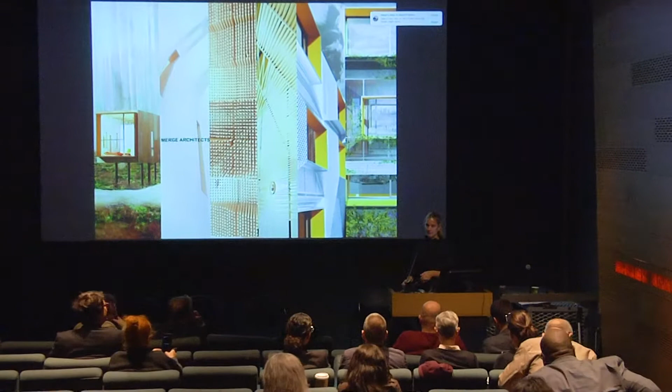I'm so relieved, Brian, that I'm not the only one up here not talking directly about affordable housing, because I got super nervous when David invited me. I'm like, I'm not really doing the HUD, in all caps, kind of housing.

But what we are doing at Merge is building housing for incredibly low prices per foot, so in theory we're also building them in neighborhoods that are not that pricey. Although I'm proud to report that all of our housing projects are creating records for high sales per foot. So I believe good design sells.

I know Larry last night was talking about how he has these pro forma sheets that he compares with all of his projects, and then the naysayer developers say, well, that's going to cost a lot of money. And he talks about how much more they make and the comps they got for the last project. So we're not as seasoned, or we haven't been around as long as Brooks Scarpa, but we are starting to also have our own short list of each housing project that has been a success in that way.

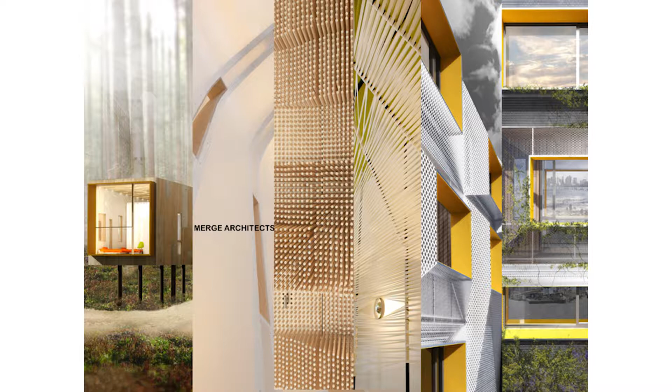So a little bit about Merge. I'm bringing up the rear here, really talking about design. I don't have these altruistic stories of amazing projects like Jackson and Kansas City. We are living in a city, Boston, forgot to say that, that is in a way a very sophisticated city, and ironically one of the hardest places to build good contemporary work.

There are so many things standing in the way. There are a lot of well-intended folks there, and there's a lot of money there. And we're booming. Mayor Walsh wants 53,000 new housing units by 2030, and yet we are a city of 9-unit projects. The reason is 10 or more per the city zoning code forces the developer to include 13% affordable units. So unless you're doing 20 units and you have the site to do 20, it doesn't make sense to do more than 9.

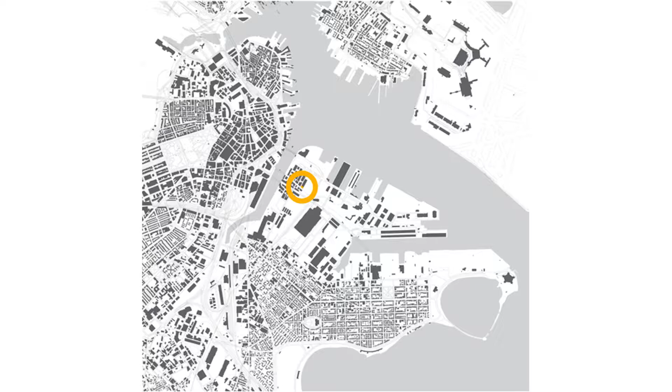My office is in an area called the Seaport, or Fort Point Channel, if you guys know Boston, an area of the city that has grown exponentially in just the last 3 or 4 years. But this is the fabric of Boston that many people know and love, with all due respect. I do too, but that's not the kind of work that we do or that we're interested in, and it's also not the appropriate

aesthetic and stylistic for a lot of these neighborhoods. So it's either the brick and the heavy layered detailing of the facade, or it's the classic triple decker, which is something we end up building up against more often.

But what we're really into, just to take it outside of housing for a second, is a little bit of just good old-fashioned craft in a way, thinking about it as assembly, putting things together.

We also make, David, that's so cool that you have a steel shop, wow. We could barely fit enough desks in our office, we don't have that kind of space or capacity. But at Merge we are actually building a lot of the pieces on our projects ourselves, and the way we're doing it is we're asking the GCs to let us borrow their boom for the day so we can build this piece or that piece. It's a way for us to be super hands-on, but also a way to maybe build something for $25K that the GC was pricing out at $200K.

So it's a combination of traditional construction and general contractors and us kind of getting in there and making it work. The kind of thing that I'm fascinated by is what can we do with this?

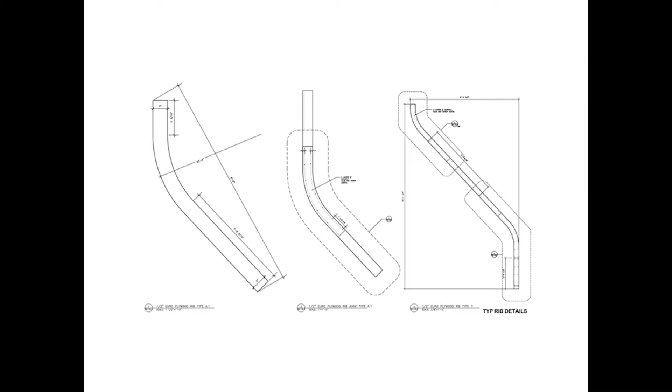This is an orthodontist clinic where the GC built out the whole space, but we did these CNC cut ribs, and our office actually fabricated this polycarb wall to create this glowing double height space within the back of this program. So that's just a little bit about craft.

The next thing I'm super interested in is the social ecology, so to speak, of architecture and how people use space, which is where housing comes in - like how people live together, living room to bedroom. You guys really set it up so well with all of your plan explorations about the living room, the core, with Brian. And so how people live within a tight unit within the city, but also how those dwellings live within the block.

Because we've been working on some pretty small scale, 9 units and less - in Detroit we're doing 100 units, but in Boston, 9 units or less so far - we really have to grapple with this. And because every developer wants to build as much as they can, square footage wise, we have to really game the zoning code. We really have to pack in 9 units when maybe it really can only fit 6. And then there are often these crazy parking requirements which seem to make the project impossible.

So Boston is tight, Boston is dense, it's very different from Jackson or Kansas City, much like I would say Philly. And you know, these 11-foot wide leftover sites are fascinating to me. We haven't quite been that extreme, but I would love to have that opportunity. But they always feel crazy tight to us regardless, even if they're wider. And they become like 11-foot sites because we need to pack 9 units into, let's say, 40 feet.

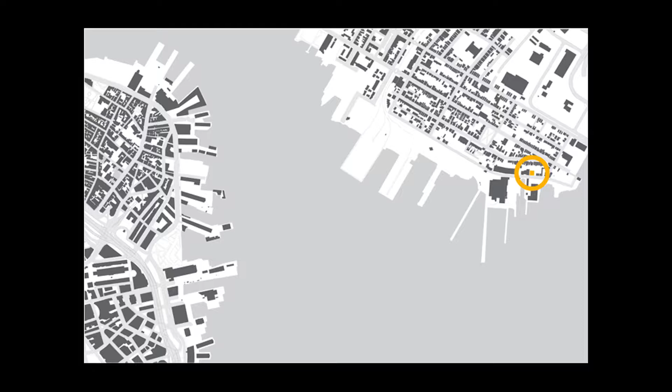Which is an active shipyard. It's partly active for the shipyard program use, but it also has a really interesting arts community where they're building these incredible giant sculptural pieces, which I'll show you in a minute. And there's a cool cafe there, which is kind of hip. So it has this vibe of an innovative place and maker culture.

And then here we got this choice little site, which conveniently is right adjacent to the edge of the shipyard. There's a chain link fence here that separates the shipyard from our site in the so-called neighborhood, which is called Jeffries Point, and flanked by the classic triple decker.

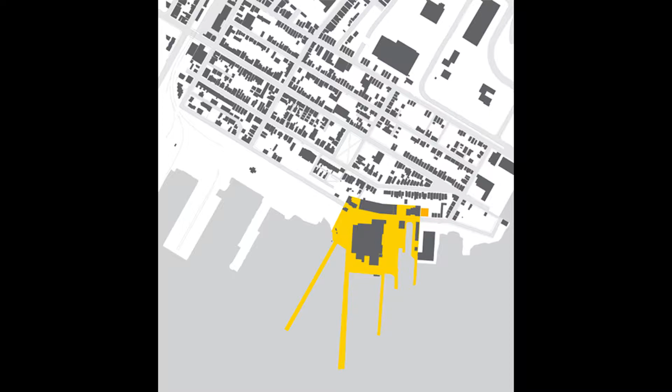So I just want to pause here for a minute. I'll show you this aerial. In Boston, I have never done an as-of-right project. I don't even know what that looks like. Every single housing project we do has at least 8 to 15 variances that we have to ask for, which is crazy. And it's because most of them, not to get too in the weeds, have an FAR, floor area ratio, of 1. That means that if you have a 2,000 square foot site, you can only build 2,000 square feet of square footage to sell.

And really you often need twice that, or 3 times, and sometimes even more. So one variance means you have to go in front of the whole neighborhood process, meeting after meeting after meeting, and the city process with the Zoning Board of Appeals, and the Boston Redevelopment Authority's design review, if you're lucky enough to get approved by the Zoning Board of Appeals. So to build 9 units, or even 4, could take 8 months to even get out of the gate. So it is very political, very time-consuming, and you have to build a narrative around your project.

And the crazy thing is, there is so much, as with any city in the US I think, mediocrity in terms of housing design - not in this room, but there is in Boston. So what we're seeing is just this sea of Hardie board, super taut facade projects because they're cheap. The kind of ugly, mediocre at best projects are sailing through the system because they're familiar. So if you're ever trying to do something exceptional or trying to push design, it takes longer.

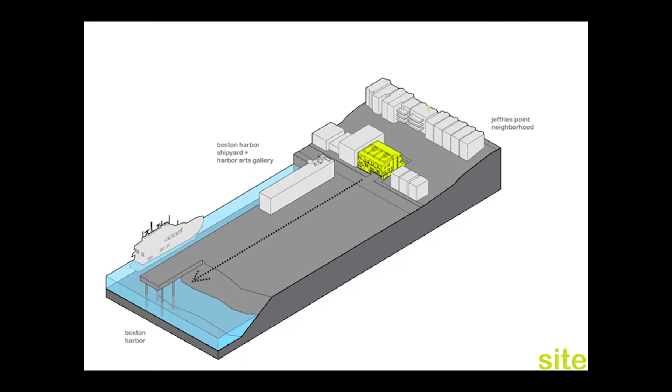All these projects I'm showing today are light frame. The challenging thing with this project was that we needed light and air for the living spaces, yet we had to have bedrooms. They couldn't fit once you fit 9, which you can see a little better here—they're really skinny, maybe 13 feet wide each, so there isn't room for a living room and a bedroom on the front facade, so we had to put them in the back.

So the crazy thing was, how do you have these floor-through units and have a common corridor and 2 means of egress on each side? We get into geeking out on these sections in housing—how do you game code, how do you pack in the 2 means of egress, and how do you get light and air to all the units. The idea was that we would skewer the units, the middle 4, with the common corridor, which meant you were blocking off the back from the front of the unit.

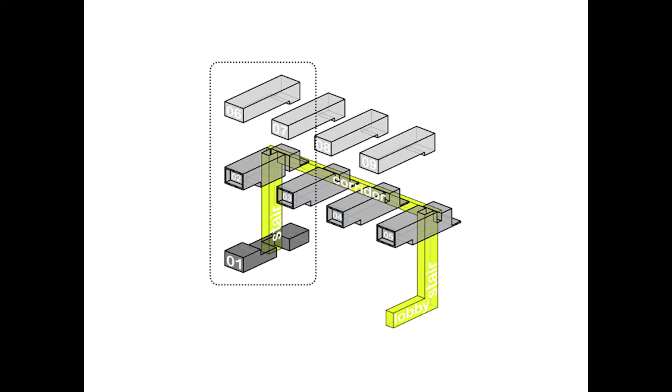So what we ended up doing, which was a problem that became one of its greatest assets, was we went over and under the common corridor. The other thing, which is a theme with Larry's work, as Brian mentioned too, is how you sneak in another floor.

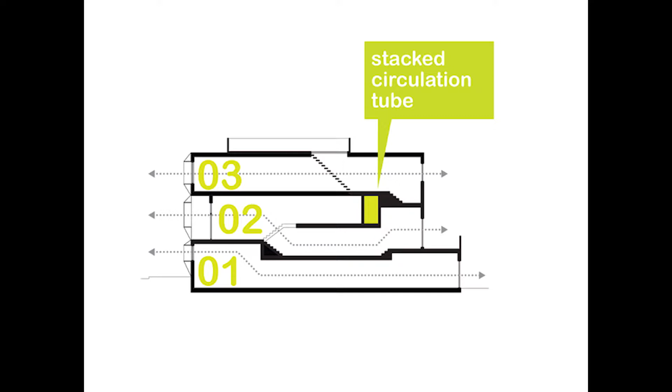We were only allowed to build 3 floors, so from the front it looks like a 3-story building. But we snuck in a mezzanine floor in the middle of the section, which allowed us to go up and over the common corridor that needed to go cross-grain through the unit. All these tricky, crazy things you don't see from the street are something we're really interested in. The way it operated was what we'd call level 0, which is the parking.

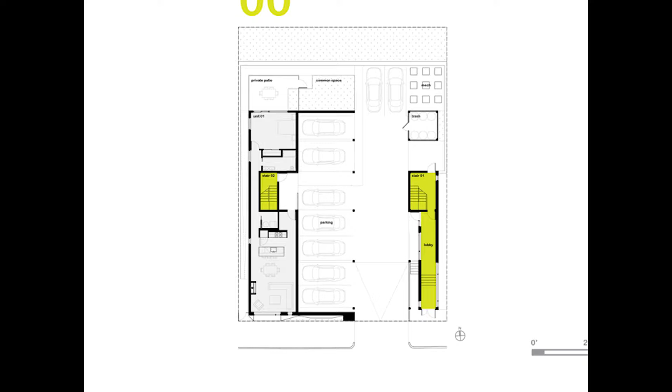The other thing politically was that, as luck would have it, one of the neighbors—our direct abutter in the back, who was slightly elevated from us, thank goodness—worked on design review at the Boston Redevelopment Authority. He had to technically recuse himself from the design review, but as a neighbor, he was at every meeting making sure we weren't going to block his view.

As of right, we could build 35 feet, but through negotiations we were not allowed to build over 33 feet 6 inches—or maybe 5 inches—because of him and what he sees from his kitchen window when he's drinking coffee at 8 o'clock in the morning. I sat with him at least 3 times to see exactly what he would see.

We made that agreement, and he was out there measuring the framing until he got kicked off by my client at the site many times throughout construction. It's crazy stuff that isn't written down. He ended up supporting the project because we came to these concessions, and we then had to sink the parking 3 feet, but we couldn't go any more than that because we were on the ocean and would hit the water table. So we were literally like this.

And of course we were right at the setbacks for the zoning side setbacks, minimum. And then we were at 0 lot line on the front and at the full allowable setback in the back.

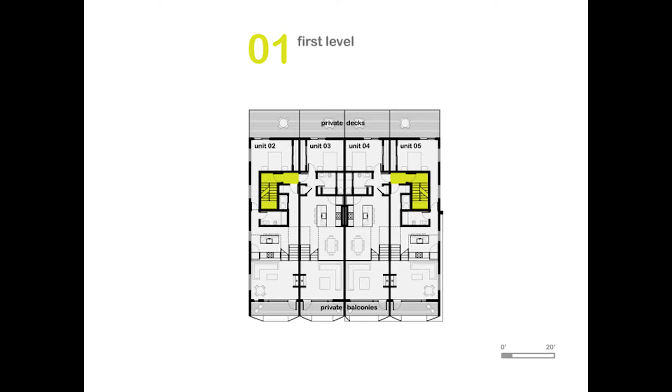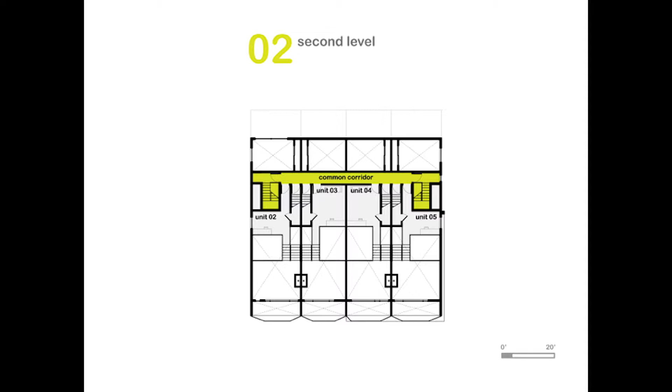So on the ground floor, there are 2 entries, 2 stairs. As you go up to floor 1, the 2 means of egress are separated, but those become technically the front doors to those units because it's closer to the street. And then on the 2nd floor we have this common corridor that I showed you in section, which allows you to check the box of the 2nd means of egress in the unit, and also to provide front doors for the top floor units, which are floor-through flats.

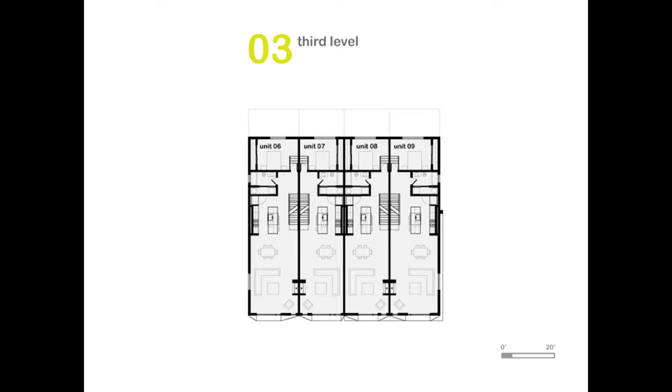If you build a 4-story building in Boston and you don't access the 4th floor from the interior of the unit, and it becomes a public access point, you have to put an elevator in. So we avoided the cost of the elevator by accessing the 4th floor only from the 3rd floor. I know this is tedious, but this is what we do.

And we think it's cool that you can figure this stuff out, and we pack 9 units on the site. And then there are 4 private roof decks, which have this amazing view. This is a really quick little animation of what I just said, which is this tube typology of the unit. How do you stack them?

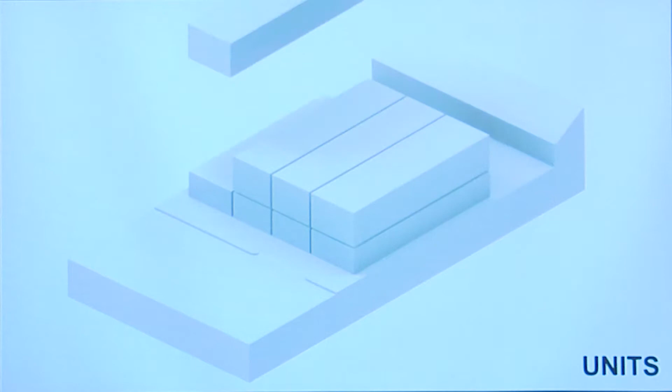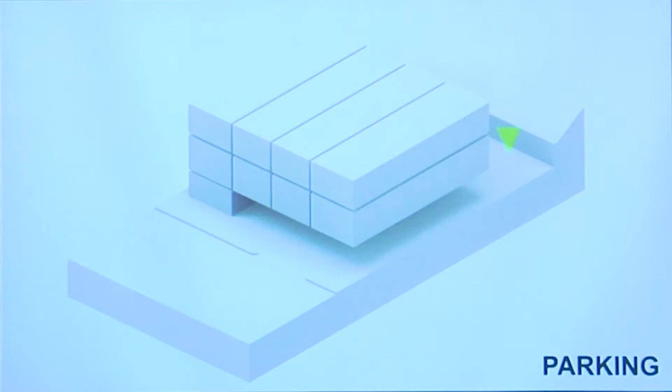At this time, within 35 feet, we had to come down a bit. Carve out, we had to have 1 parking space. Here we are packing the site, and we have to get 9 cars in there. So we carved out the ground level, and went down 3 feet for the parking, which allowed us to think of this more as a basement per code.

And had one handicap unit on the ground level, which is the lower level. We cut the section. This was our problem.

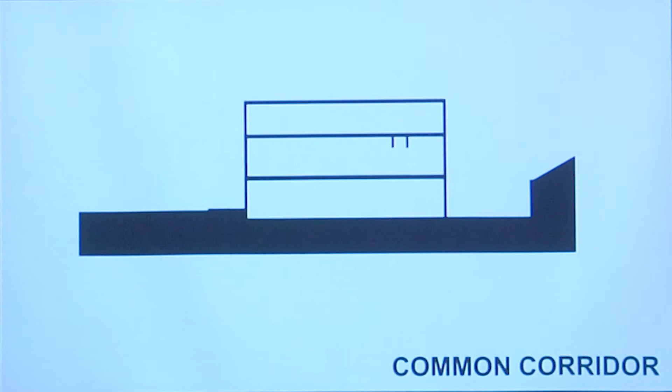We have 3 stacked tubes, which in theory meant that the common corridor would have to go through one of the units, the middle unit. So we ended up doing that, which is of course going under and over.

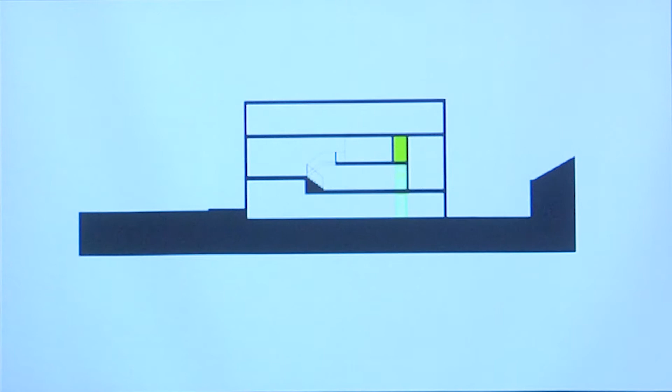Everybody gets views out to the water. Bedrooms in the back still have light and air, but they don't have as good of a view, but it's okay. They have balconies in the middle units off the back. We tried to equal out all these super tall bedroom spaces. They're actually kind of amazing, even though they don't have the view, they're very tall.

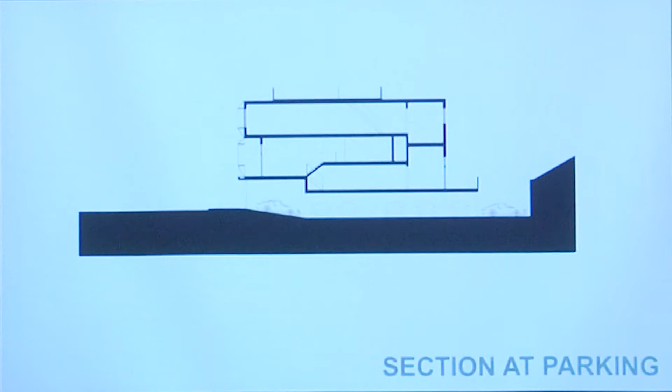And then what we try to do at every project is really ramp up the green space. So parking, pockets for green, skewed common corridor. It's tricky, it's a puzzle. So we end up with this dumb box because we have to build it for $170 a foot, which might sound high in some parts of the U.S., but was extremely low in Boston at the time.

And then we go back to the facade. So really, all we get at the end of the day as an artifact that you see in the city is often the facade. We don't typically get the side even.

And so I wanted to show the early work to show you what we're really interested in, which is about making and fabricating, and what does that have to do with housing, but also this sense of social choreography and how you actually think about the dweller, the city inhabitant, and the streetscape.

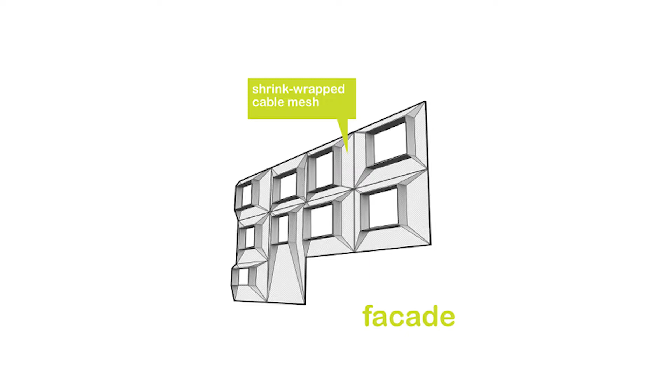So then we get into ideas about the facade and how we layer it and have these thresholds from the living room space to the streetscape. For this particular project, we were really thinking about the kind of crude but interesting language of the shipyard with the chain link. We weren't going to put specifically chain link on the building, but something that was reminiscent of this industrial palette.

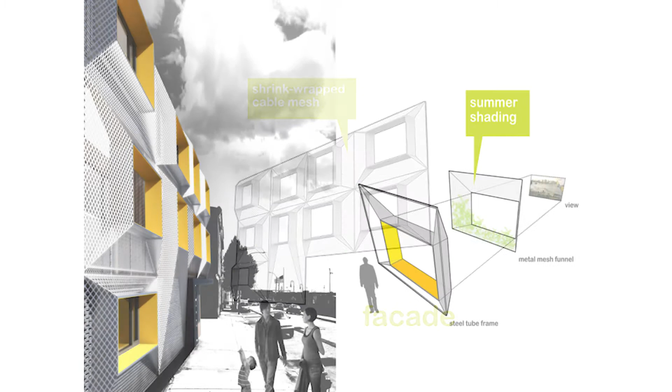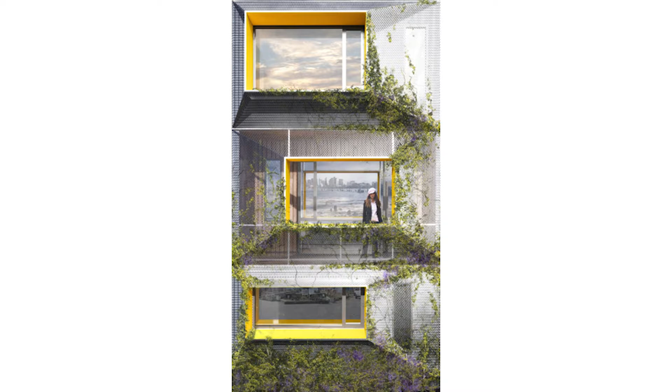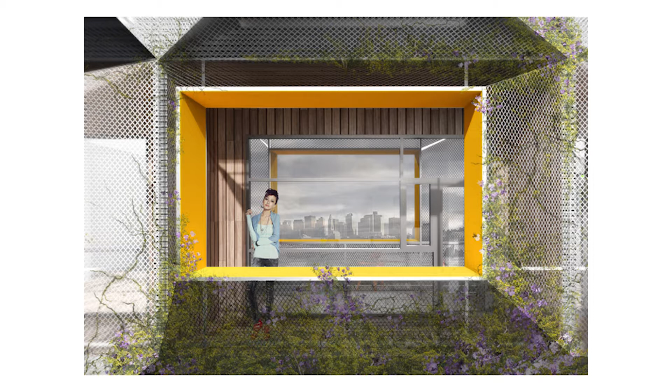So we ended up looking at a stainless steel screen material mesh from Germany that we wrapped around these super frames. So we have very modest windows, Andersen windows, and then we have these very one-off custom super frames that we painted yellow so they're brighter. They actually bring light into the space when the sun is hitting them, and then these shapes around them create this figural facade that at times feels kind of opaque on the oblique and then super transparent from head on.

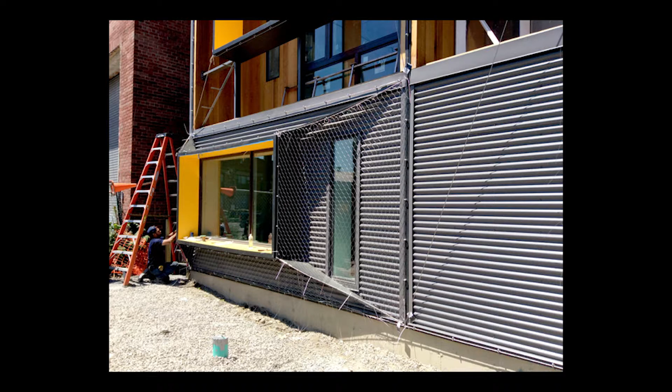And so the way we sold it to the neighborhood was that it would become this green screen. They could grow on it at this sort of concrete hardscape corner of the city. It's finally starting to take a little bit. But same concept, we didn't build this one. They wouldn't let us get on the boom and do it. But we did find in a steel shop somebody who worked on ships and netting for fish traps, and he actually sewed this facade onto these triangular gusset plates.

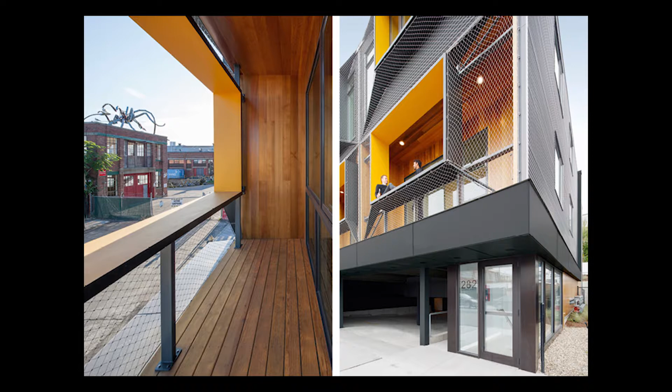So again, very inexpensive. You see the layered space between the screen and the balcony and the super frame, and the parking below. It's not much—I think it was 4 feet wide—but it's sort of everything. And these spaces are beloved. Every time I'm there, even in the winter, there are people out on the decks, out on the balconies, with a view of the sculpture.

And so that problem with the corridor going through the cross grading through the units actually created the most dynamic units. These are 3 stories, and they're split level, and they feel very voluminous because they have 1.5 stories within the living room space. They have this catwalk condition that crosses over the gap, and the top floor and the lower floor are only 7.5 feet, which sounds awful, but because they open up to this double height space, it feels large and expansive, and of course has a great view of the water.

Amazing view from the roof.

And so we just completed, these are just some snapshots from a week ago. The building next door, we took down a triple decker. It's a double wide site with a small drive, and have now built, same concept of the tube, 6 more units. It's the same idea with the frontage, which is to create this whole new typology along the street of these thick and thin moments on the facade that are 3-dimensional on the street and create these balconies. And this is our way of getting through the neighborhood process, which we still have to go through for each and every project—now on our 3rd.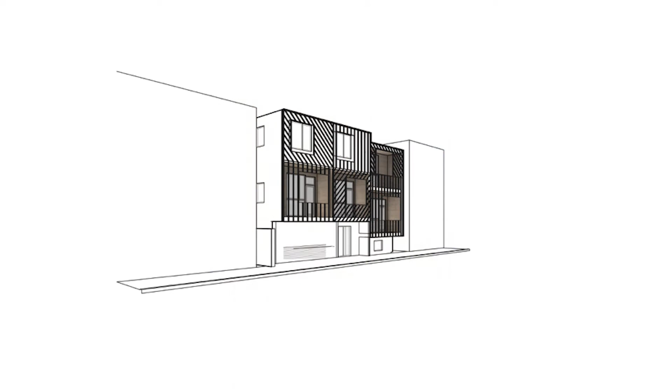This is obviously steel slats, still getting back to our interest in fabrication.

And then lastly, I know I just have a couple of minutes, how we are bringing our interest in concepts to Detroit. So we were hired by Bedrock Development a couple of years ago, and they're an amazing client. They actually bought blocks and blocks of parcels that look a lot like this—complete blank slate—other than these incredible historical mansions that were either abandoned or made into boarding houses or underused. And they were smart enough to hire not just one architecture firm, but 4, actually 5, including the historical architect, to build out these blocks of housing. So they needed to create this urban density overnight.

Detroit is amazing. If you have a chance to go in the next few years, you should. It is booming, but it's like no other place I've ever been. It is incredibly dynamic. It's a complete maker culture, not just cars, but they have a lot of infrastructure and a lot of work and a lot of building and a lot of infill to go.

So they hired an architect from the East Coast, which was us, the West Coast, which is Loha, Lorcan O'Herlihy that Larry mentioned last night, from LA, Studio Dwell from Chicago, and HAA from Detroit, to do some very contemporary housing. So we came in as a group and had these amazing schematic sessions with 60 people in the room to talk about what we thought was appropriate for this area. So the issue with Detroit is security, lack of density, lack of inventory, and then the pride in the neighborhoods that have stayed rallying around these old historical structures.

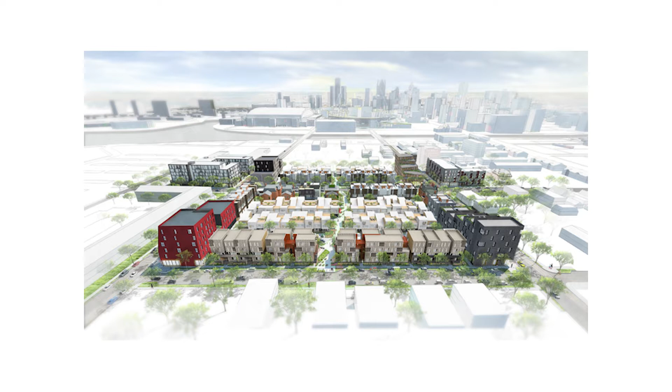So our scope is this front right here, which we call the duplexes, along one street, and these white buildings that are not actually that white, called carriage homes, within the blocks. We have six blocks of those. The large corner buildings, the apartment buildings, are by LOHA from LA, Lorcan O'Herlihy. Then there's some townhouses mixed in from Studio Dwell, and HAA has some of these larger projects throughout as well. So our scope was this, and what we're starting construction on in the last six weeks is this.

Are these blocks right here. So we're starting with one of these smaller blocks, which is about 11 units. So they vary from 9 to 11 units each.

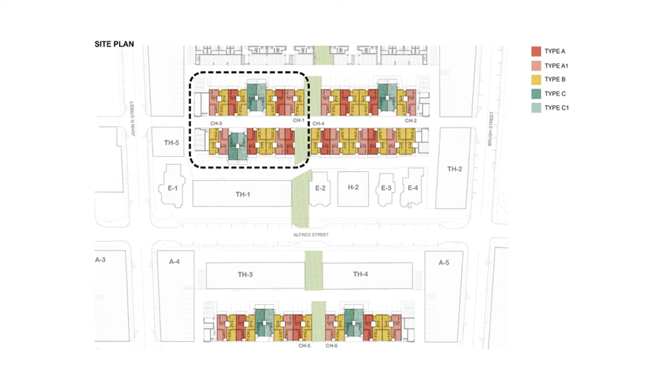What I was interested in, and the office was interested in, is really looking at this theme of the courtyard, which has come up a lot. But for us, we wanted to somehow insert it into this tight, dense, pressurized footprint of the carriage home. So they're deep, they're windowless except on the front and the back, and they're narrow. So what we did is we actually put in these very small private courtyards between two units.

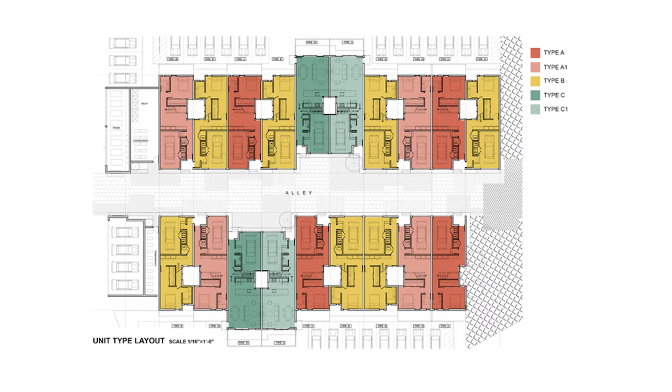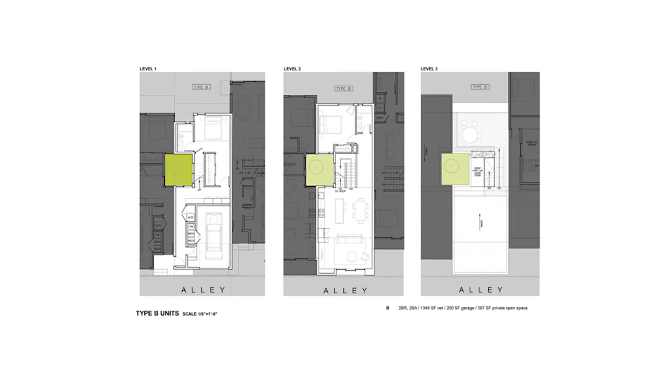The dynamic is really interesting because you can't both share it due to the privacy problem, the lack of privacy that would imply. So each unit has access either by diffused light through translucent glass, or by transparent glass if they actually own the courtyard. So one unit owns it, can access it, and has transparent glass, and the unit on the other side, in the darker gray, has borrowed light from it with diffused light and translucent glass. This creates a pocket of light, air, circulation, and ventilation within these tight footprinted spaces.

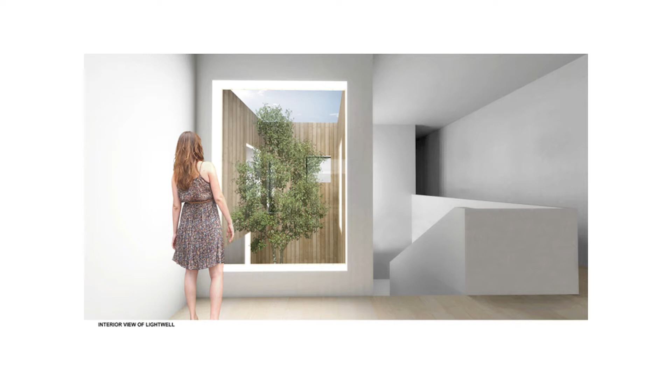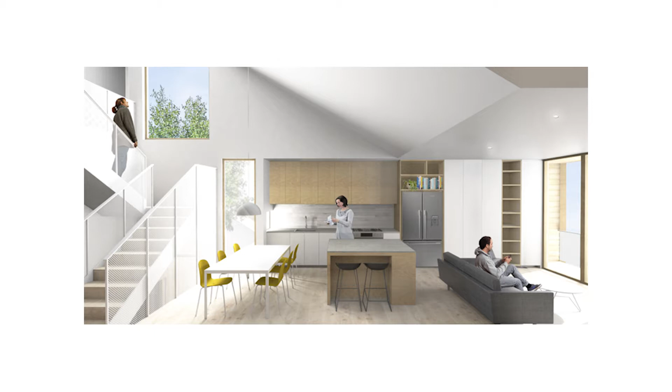It's a mix of two- and three-story units. We have three different types, A, B, C, and each one, except for the B unit, has a two- and three-bedroom, two- and three-story version. That courtyard plays out within the interior, bringing in light and air and this illusion of exterior space within the unit, which is very tight.

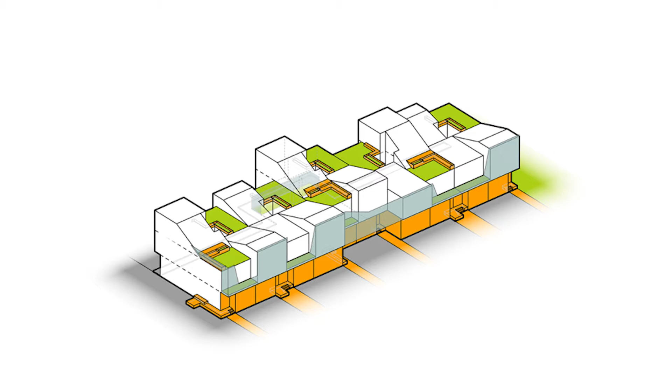What was really exciting for us, rather than the balcony—although these have balconies—was this roofscape. You hear a lot about in architecture school, the fifth facade, but this really does matter on the site because those tall apartment buildings look down onto our project. Because we're building these carriage homes technically within the block, we wanted to create this exterior outdoor space on the roofscape, which is only two stories up.

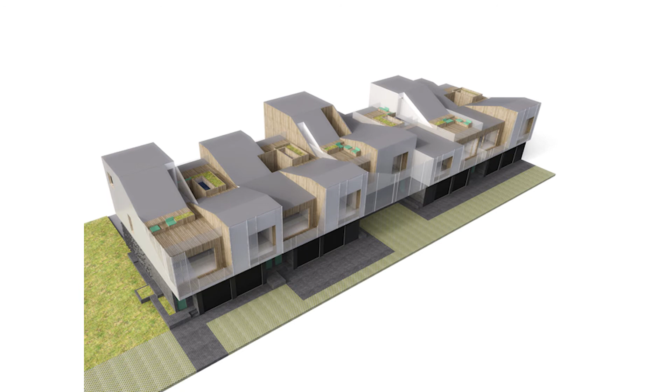That would be part of the social life and network within the block itself. So we have these undulating roofs that slope up to create the third bedroom and third floor for the units that have it. The way these decks oscillate back and forth between the units, they're somewhat private, somewhat public—you can still say hi to your neighbor, but you have a little bit of privacy. And then there's the kind of formal quality and landscape that creates from the apartment buildings on the corners.

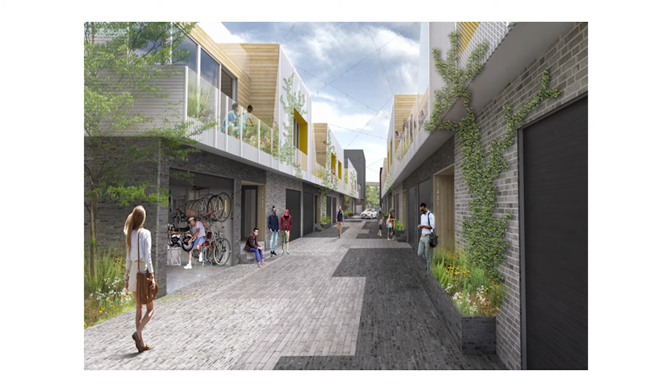So how we're trying to kind of texturize and textualize the facades of these with these balconies and more screening, translucence and opacity and so on with the material palette. And that's how we sold it to the neighborhood.

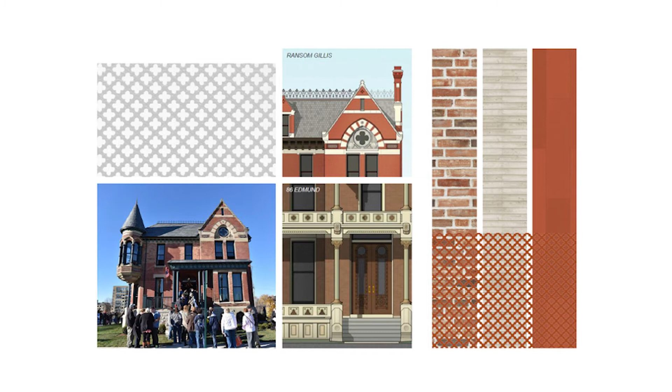They originally saw this and thought, whoa, this is really out of context with regard to the heritage homes that we have on the site and have had historically on the site. But we walked them through the way we were thinking through the narrative of the materiality, and we were pulling out details. In this case, there are these clovers everywhere on these homes, and we found a way to create a pattern out of this in the stainless steel mesh that could then be deployed throughout the facade, and they thought that was cool, so it worked.

We're working with some brick, trying to bring the brick palette back into it from the heritage homes. And then lastly, the duplexes, which is just 2 blocks along one street, Edmund Place.

What we were really trying to do, and this was more from the landscape architect for the master planning of the project, they have this amazing swath through the block called the Mews, which is going to be pedestrian access only. It allows the block to be split up because it's super wide, allowing for this great pedestrian passage.

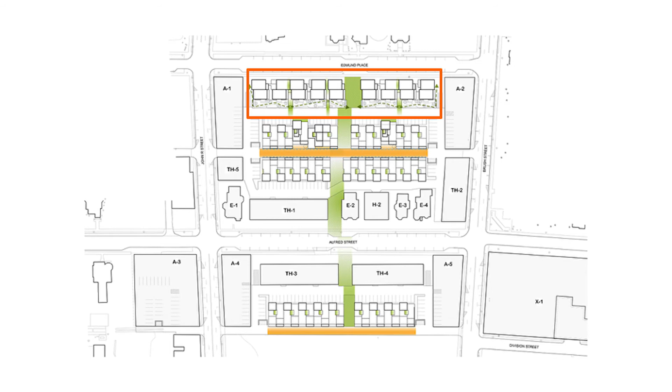So we wanted to have kind of a miniature version of that idea along Edmund Place. Rather than having this solid urban wall, we designed these to have cuts that would create puzzly keyhole spaces that you could filter in through the streetscape into the depth of the site.

This was just a conceptual series of diagrams talking about how we thought of these. They're 2-story units stacked, and then they shift, with front units and back units that actually face the cityscape.

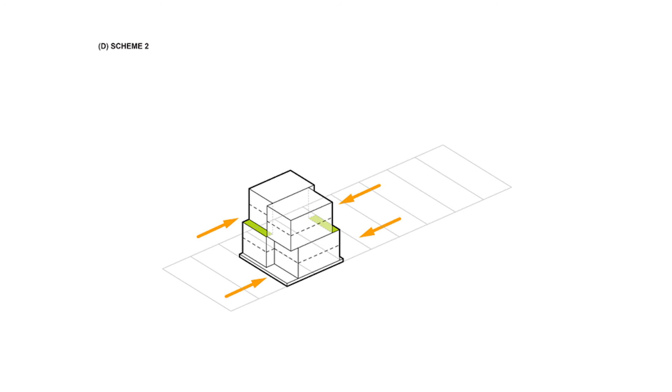And then finding ways of strategizing different opportunities to create these balcony spaces off of the shifting of the volumes and carves of the streetscape.

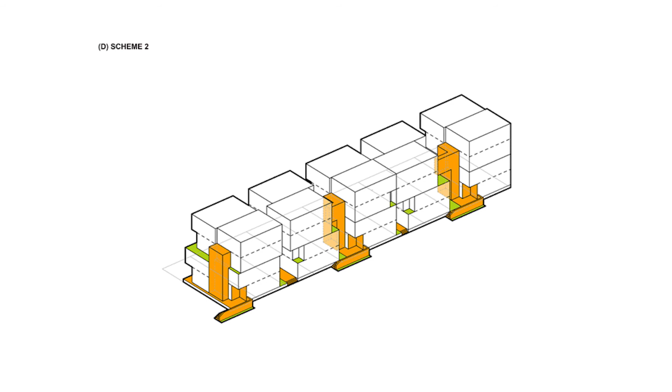And then really looking at these gap spaces, not just the lower level entries, but also these stair towers that we needed to get up to the upper units, and how that would become part of the architecture and part of the experience of those gaps.

Parking-wise, we had originally a master plan that just had a sea of parking between the buildings. So what we wanted to do was sort of glorify this idea of a carport and create this roofscape landscape for the upper level units to access from the back.

There are 2 different types that go into the block: the one I just described, which was stacked, and then another one called banded. The banded is just a straight balcony condition off the street.

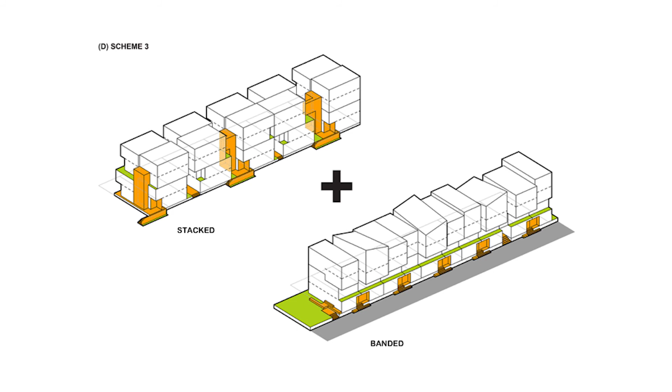And then what we did is we puzzled these together as this kind of collage of housing types to create this varied streetscape that might actually come about over 30 years, but of course this needed to happen pretty much in 2.

So we're trying to create the texture of a more slowly forming, kind of randomly placed adjacency of city blocks—something that is often not a design strategy, but is how a city is actually formulated, which I think is kind of amazing. So we were trying to build that sort of logic into the block itself.

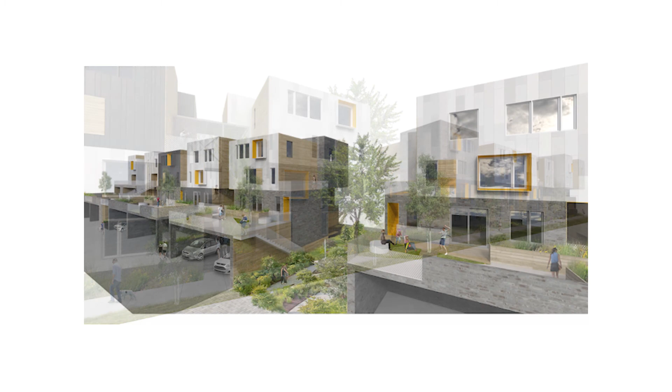So a view of the carport, the landscape. Again, the city blocks and the gaps between, and then how those green spaces are flanking the units.

Oops. Okay, I'm going to stop there.

So I think that we're actually starting to work on a HUD project for the first time in Greenwich, Connecticut, of all places. It's in the early stages, so it's too schematic to show. But what's fascinating to me is that affordable housing, by definition, costs more money per foot.

We build these projects as open shop projects, so these are not union projects in the city of Boston. There's an economics that is a reality, but also a reality in terms of the zoning code and the fact that we have to find a way to build better housing in these 9 units and less properties. Thank you.